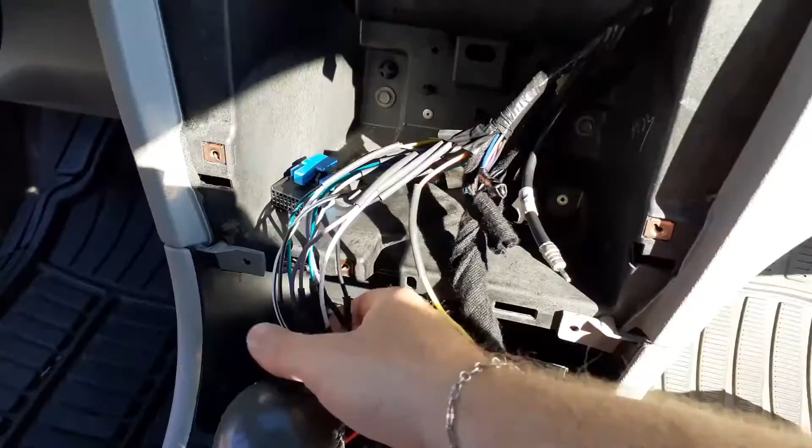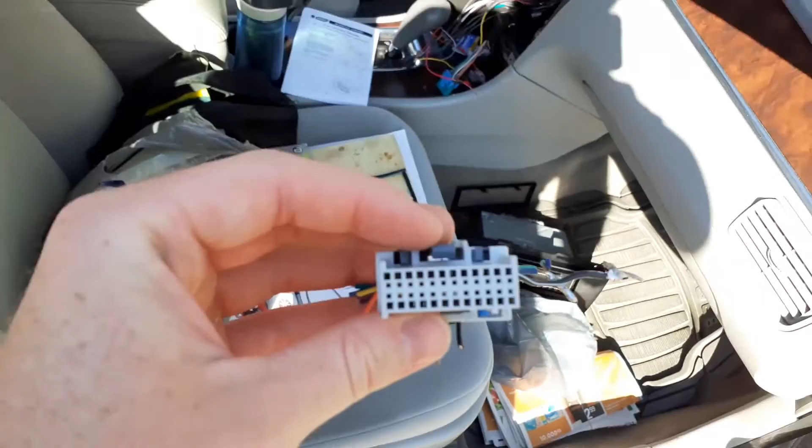So that's what the wiring looks like right now. I cut off the factory radio harness, just completely cut it off.

Here is the old radio that was in there. There's no aux or Bluetooth or anything, so there's no way in hell I'm gonna drive without that. So I'm putting in a new one.

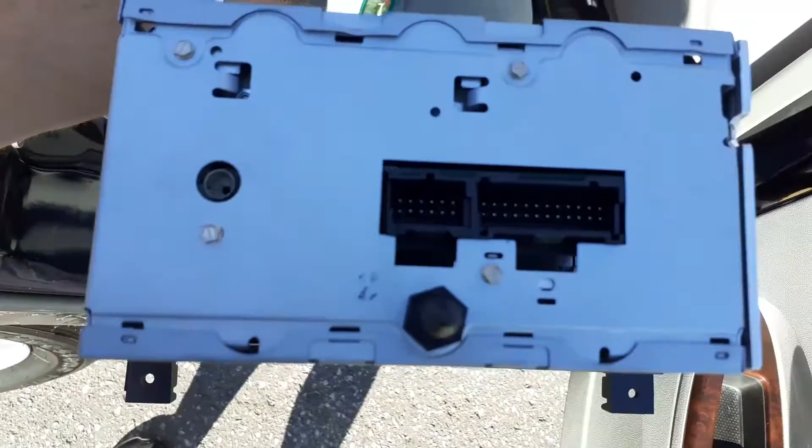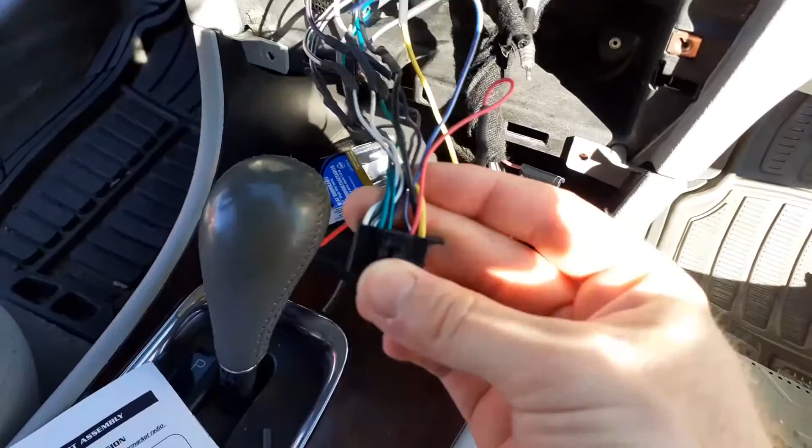As you can see in the back, it's kind of hard to see, but there's two wire harnesses going into it, and then one port here for the antenna. A lot of GM vehicles, it's going to be pretty much the same. This is the harness going into the Pioneer here. I haven't soldered them yet, but I've sort of pre-made the connections here.

It was a bit more complicated than I thought it was going to be, because there's OnStar, and there was a bunch of wires that basically you're not going to be able to use with an aftermarket stereo.

As you can see, there's a bunch of buttons on the steering wheel here that normally would control the stereo, but with the aftermarket it doesn't really give you the option.

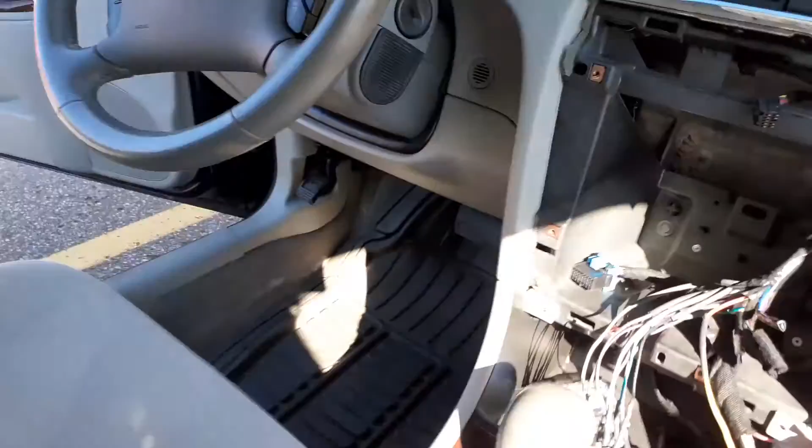But there is an adapter or something you could buy, but it's like 120 bucks, and I just didn't feel like spending all that money. I never really used the steering wheel controls, and all these wires here were originally plugged in.

So as you can see, I basically have no use for these guys anymore. I'm assuming these wires were to control the steering wheel controls, like volume, next, switching channels and all that. So that I won't be needing.

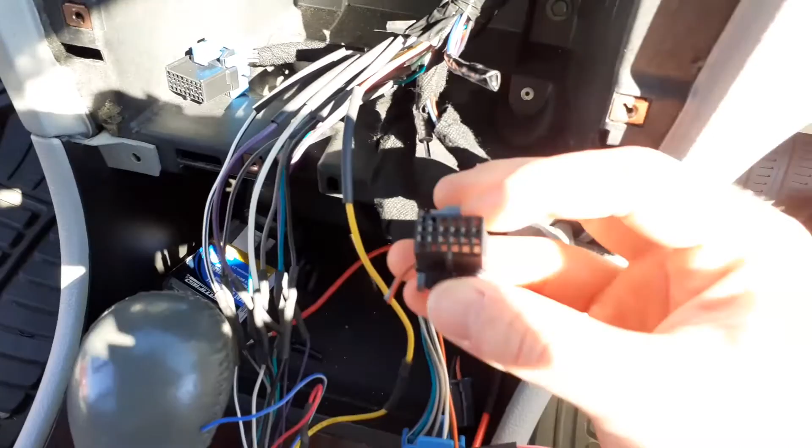And these here, I'm not really sure. This is the second harness, right here, the other harness that was plugged into the stereo. But there's only two wires, and honestly I don't really have much idea as to what they're for.

But I already tested all this. I haven't soldered it yet, but it's good to just tie them together, and I plugged in the stereo and everything works fine. So yeah, and I googled the wiring.

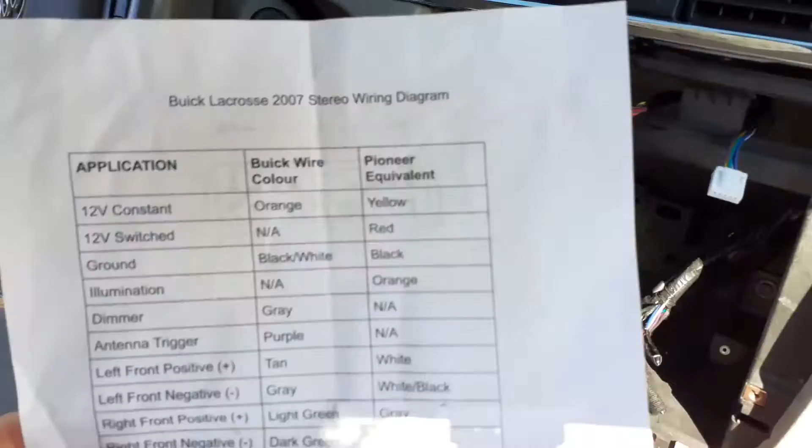Actually, you know what, I'll just show you guys, and then you can pause the video. This is for a 2007 Buick Allure stereo wiring diagram. So this is the Pioneer colors.

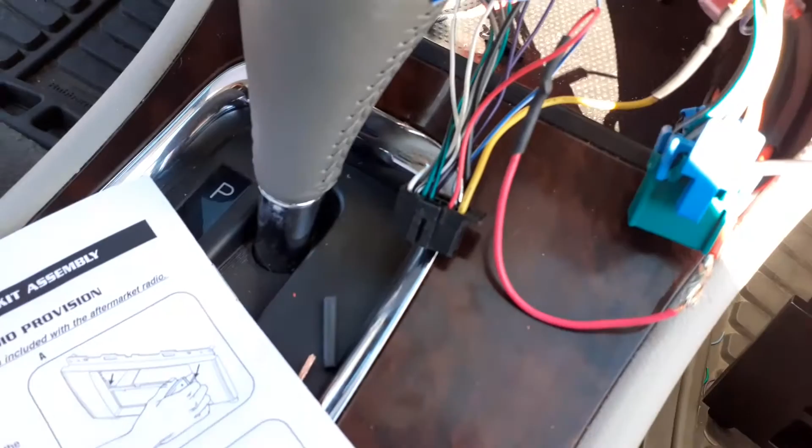So those ones there coming out of the black harness. And then, as you can see further up, it's kind of hard to tell, but this part here is coming out of the car. And then I'll just show you here, see I twisted them together, so I could test it before soldering.

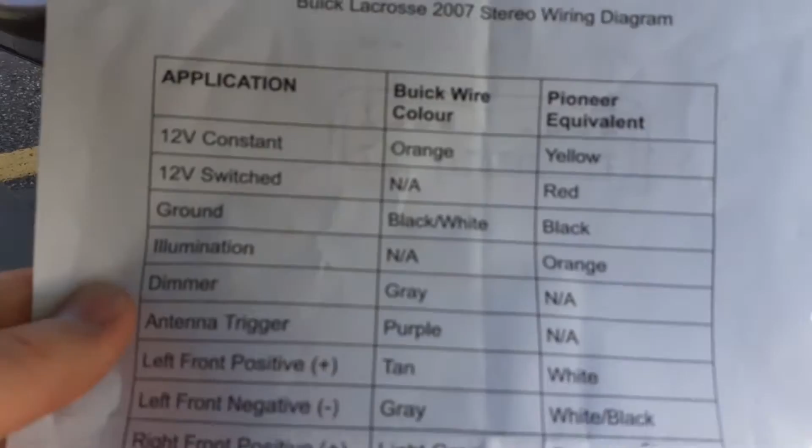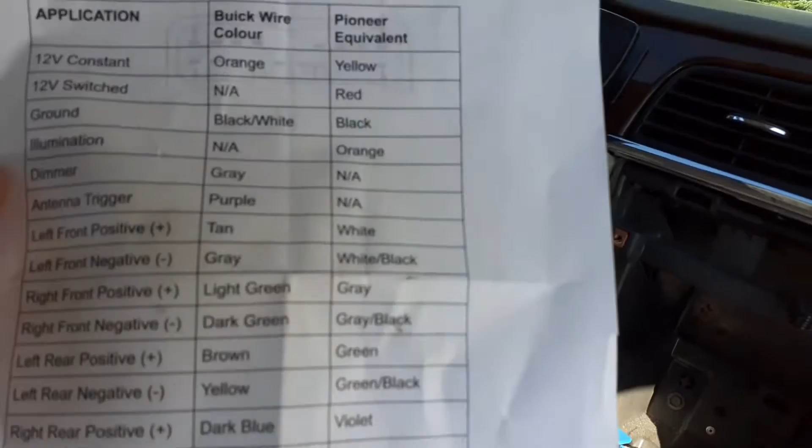Okay, so I just googled Buick Lacrosse stereo wiring diagram, and basically got this whole row here, the Buick wire colors, and then the Pioneer equivalent. This is the universal aftermarket colors here, like EIA or whatever, I forget the name, but they're all universal.

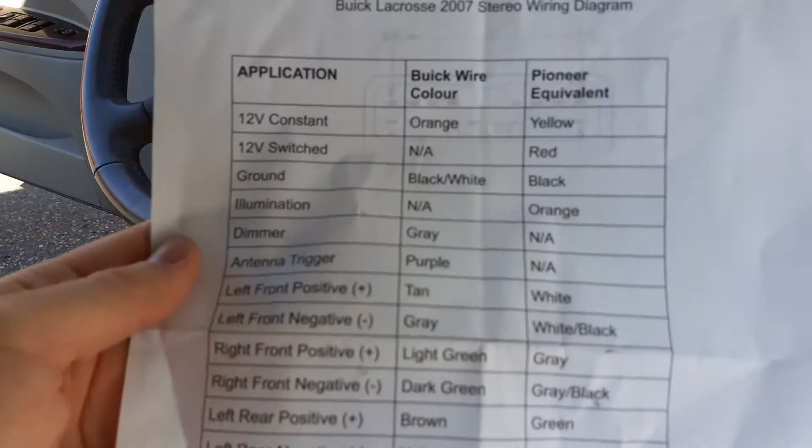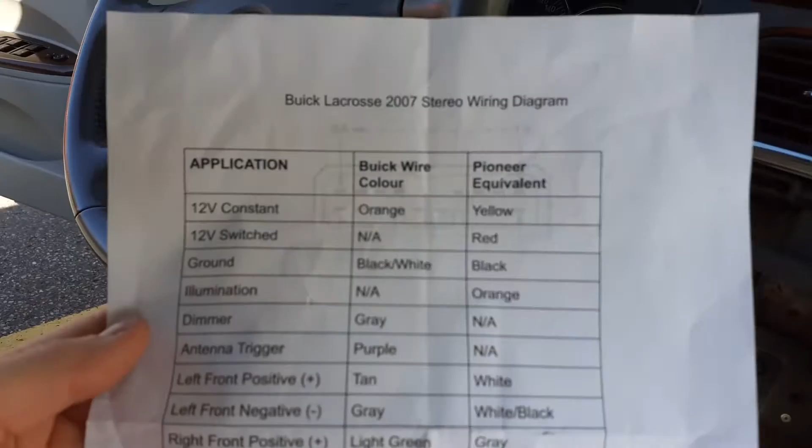So yeah, if you've got a Buick Allure or possibly a similar GM vehicle or another Buick, it very well might be the same exact colors for your car as well. So yeah, pretty straightforward.

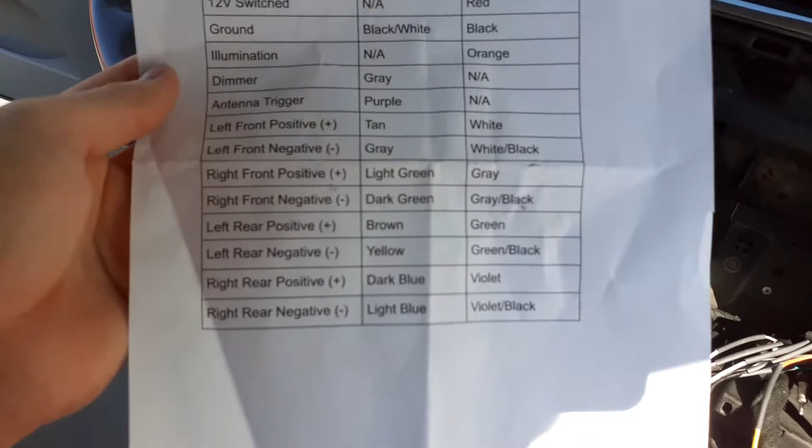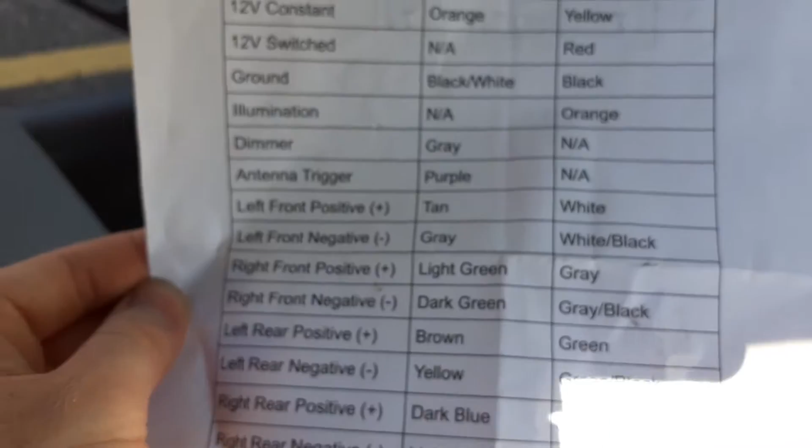There we go. Yeah, so if you want to pause it, some of the wires are going to be slightly similar, like there's 2 gray wires coming out, so it's a bit confusing.

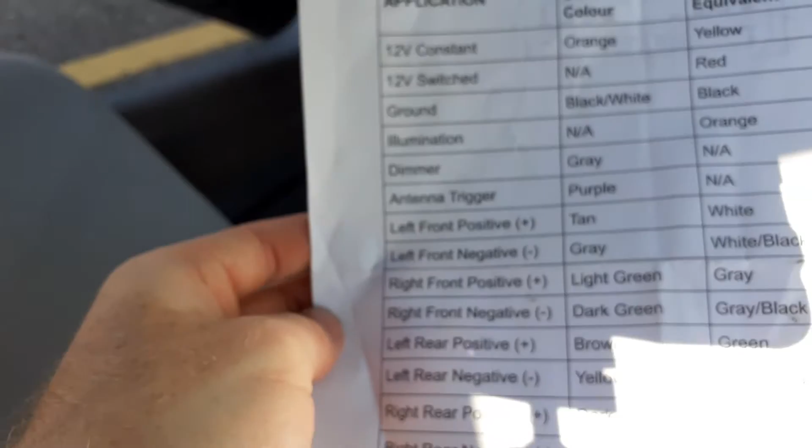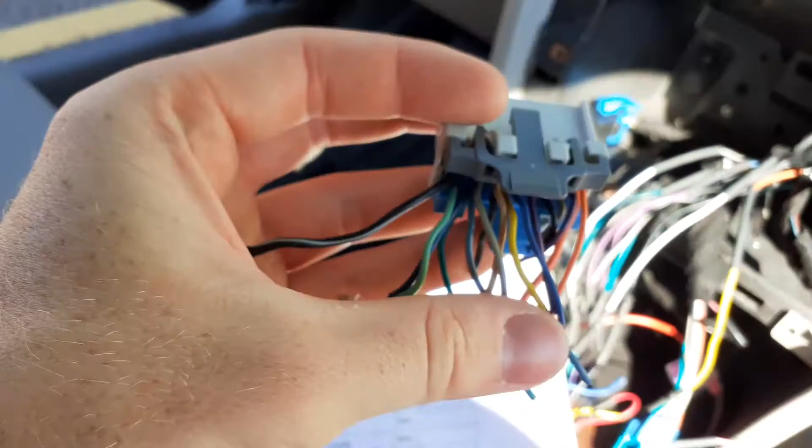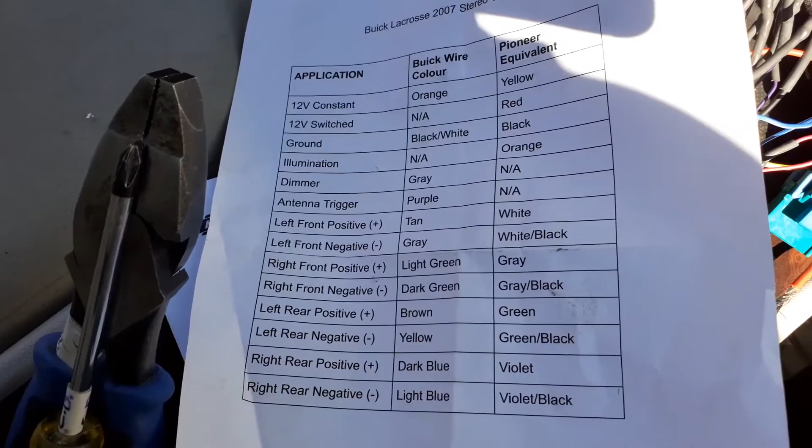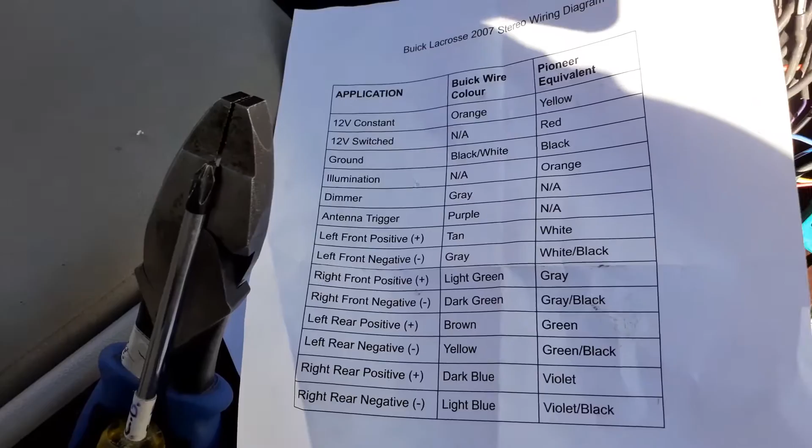But the way I did it is, when you take the factory harness and look at the wires coming out, you can distinguish which one is which, because for example left front positive and left front negative will be adjacent to each other in the harness. So let's say left front positive is tan, and left front negative is gray.

So you can see there's a tan wire and the gray wire there that I pulled up. But what confused me at first was that there's also another gray wire. I'll pull these out of the way, there's another gray wire here. As you can see, I'll point to it right here, this guy is also gray.

But the way you can tell is that these are adjacent to each other, so these are going to be both the front, left front speaker wires. The gray being negative and tan being positive.

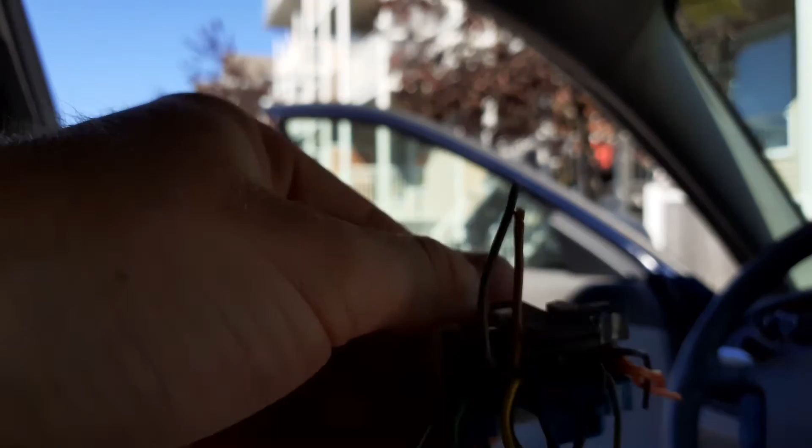Okay, so now that we got all that covered, this isn't as straightforward as you might think. Even if you did have a wire harness, it's a bit confusing, because the problem with this car is that there's no switch wire.

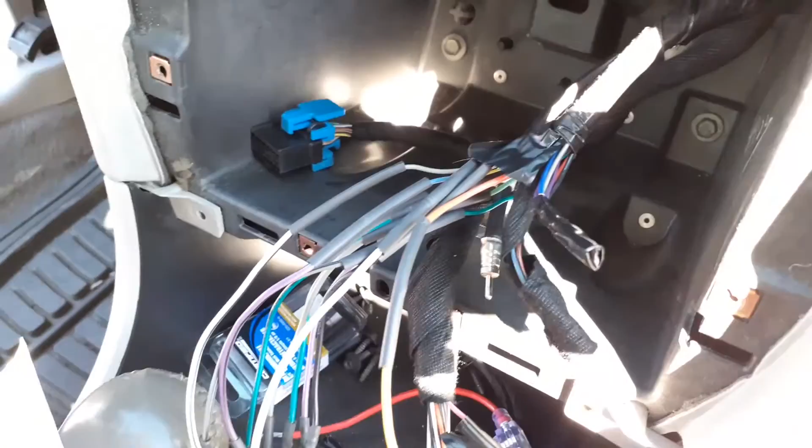So there's 2 power wires going to the stereo. Here, I'll show you. There's the yellow wire here - this is the constant power, the 12-volt constant power, connected to the orange. The way I found that out was I took a multimeter and probed every wire to see which one had 12 volts. It was around 12.2 volts.

And then, so that was this wire. But I also checked - even with the key turned, you should have another wire showing 12 volts, the switched one that comes on with the ignition. As I was turning the key, there was no other wire that came on. But you need that for the stereo in order to turn it on and off, because this constant wire is really just to serve the memory in the stereo, to keep your presets and basic settings so it doesn't reset every time you turn the car on.

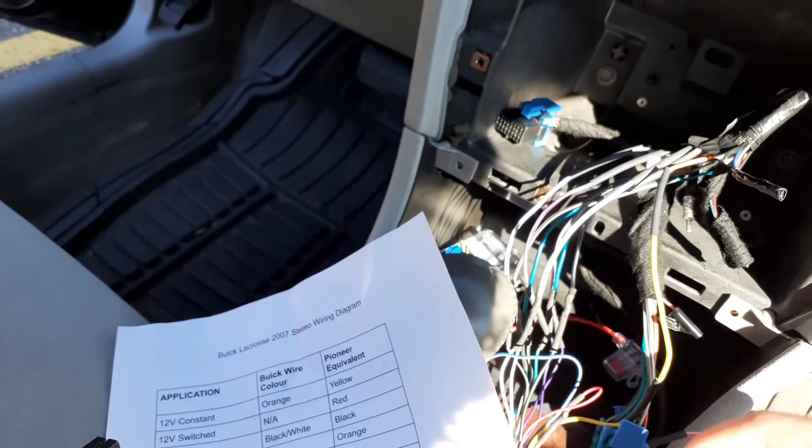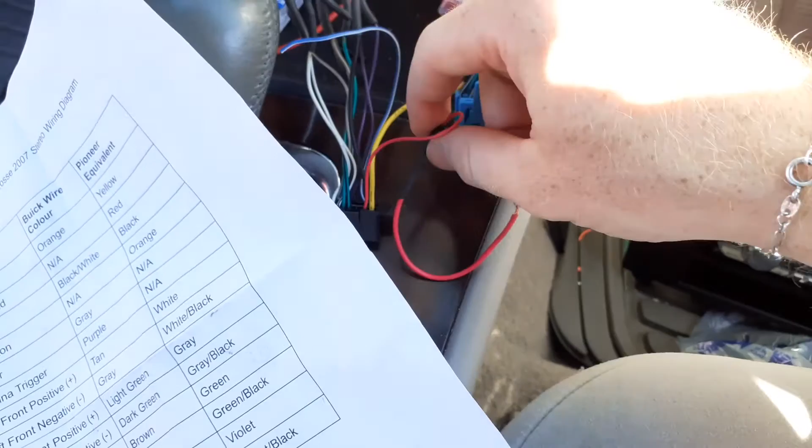So that's what that's for. And then the switched wire is - where is it? Oh yes, so this is the switch wire here, this red wire. Normally the switch wire is red, and the constant power is yellow.

Hey guys, I forgot, so I kind of ran into an issue. I had it hooked up to the AC, or the temperature control unit, and the issue was that it only came on when the key was on the setting right before.

Fuck, my cat's just got her dirty paws all over my car seat. Anyway, but...

So I don't know, it was kind of annoying because what happened when you turned the ignition or the engine off, the radio would come off as well, because when you turn it off, it skips one of the key positions. So it was just annoying because every time I turned off the car and I still wanted to listen to radio, it would just turn off as well, and then you'd have to turn it one more click.

I forget the name of the key position right before the... Hey, get up. Freaking cars - or my cat was just scratching at my seats.

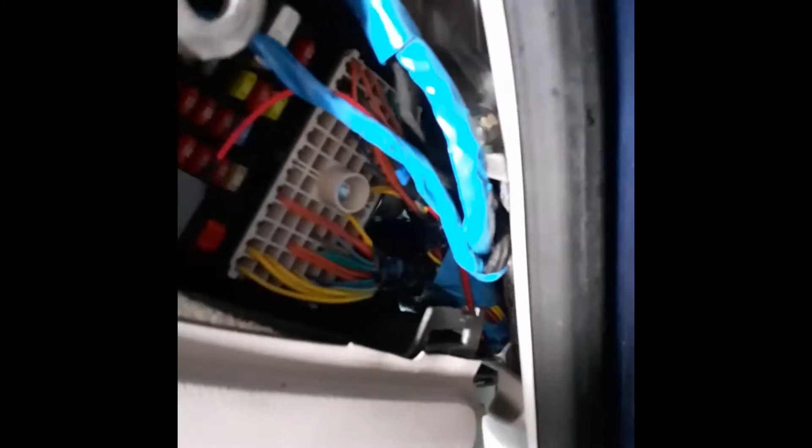Okay, so this is the fuse box on the passenger side here. There's a lot of accessories and stuff. Through process of elimination, I basically tested all the fuses, and the sunroof fuse ended up being right below this gray box here.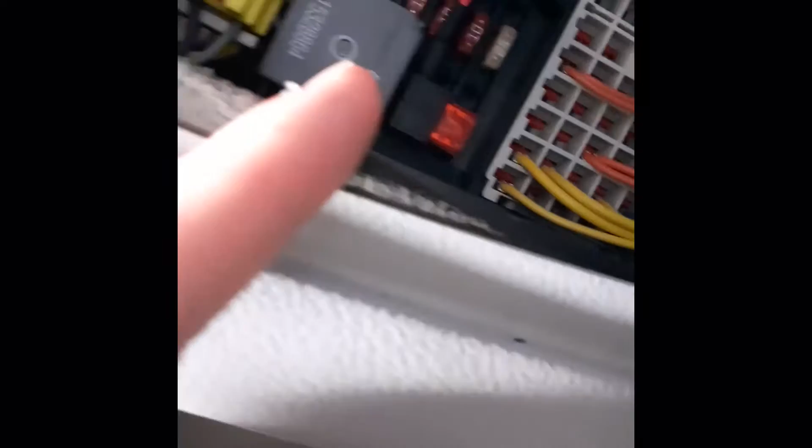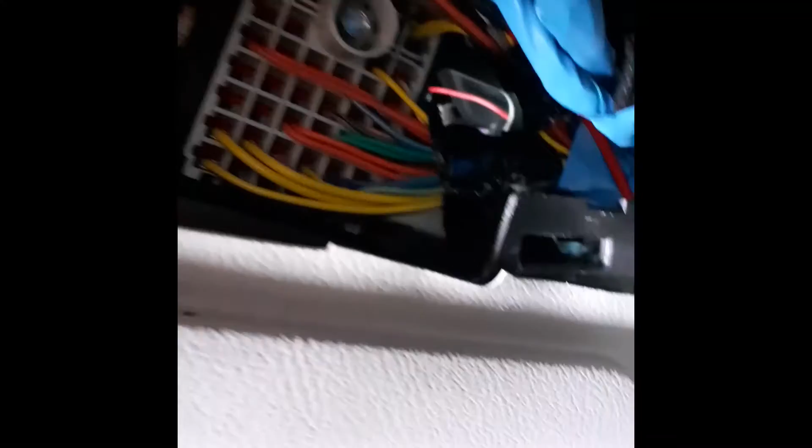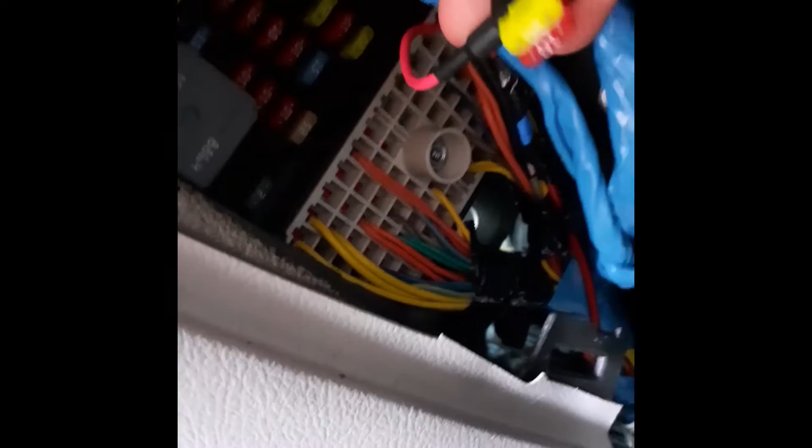So here, I'll show you what it looks like. The sunroof fuse is a 20 amp, and this is the fuse that connects into the switched power line going to the stereo. You can see it's being run behind the glove box, and then into the dash right here and out through there.

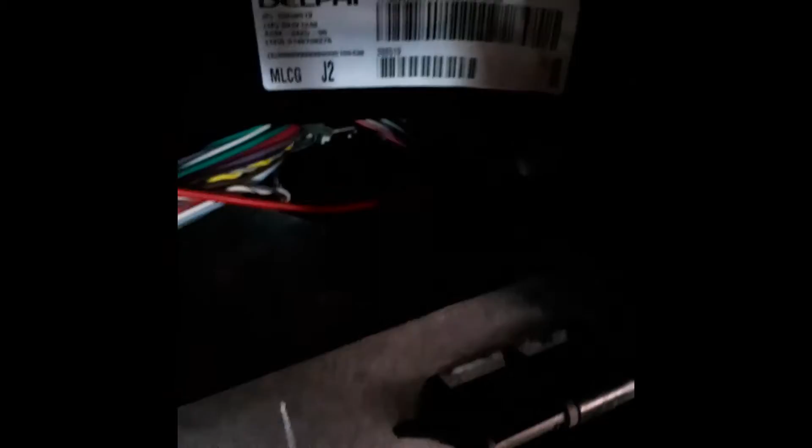I don't know if you can see the zip tie, but I'm just routing right now. You can see one zip tie there, I've got one more down there, just making it clean.

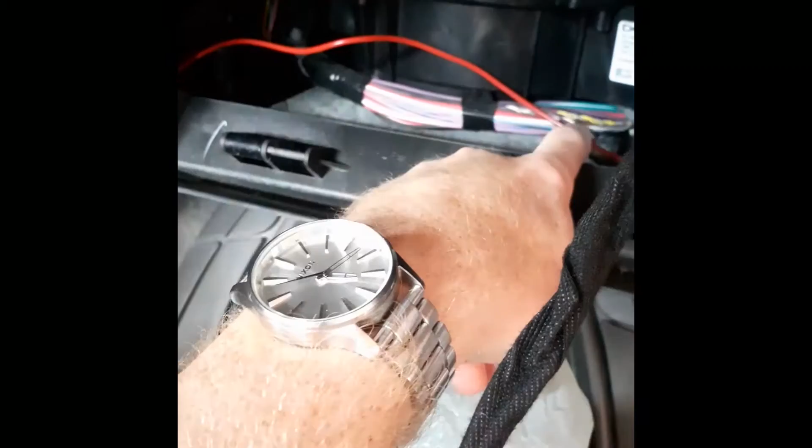You want to make sure not to run it in front of here, which is the airbag, where the airbag comes out, so just steer clear. Just a little advice: try to run whatever cables you're adding, like a sub or whatever, along the same line they took in the factory where all the other wires are. It's easy and safe to just follow that line, so you know you're not in the way of anything.

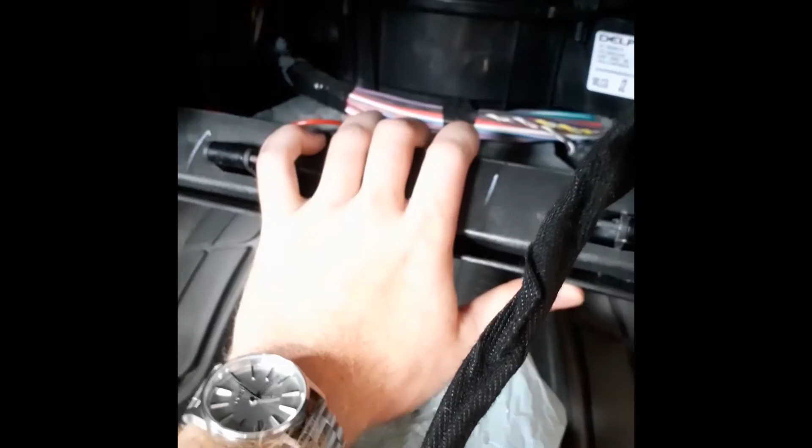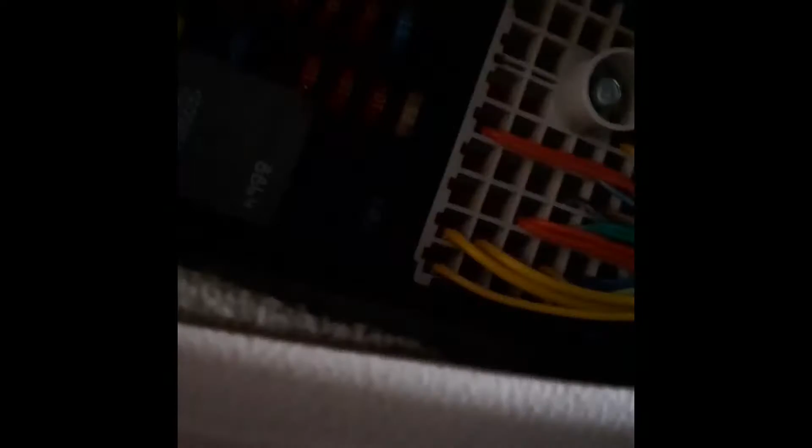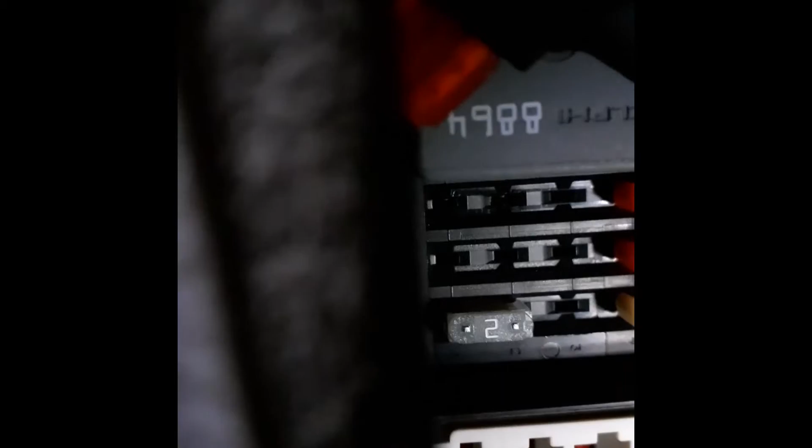So this is what it looks like. There's two prongs - this is where these go into the original slot, two up from the 2 amp, right below this gray box. That's where the 20 amp sunroof fuse used to sit, and that's exactly where you're gonna put the fuse tapper add-a-circuit device that you see right there.

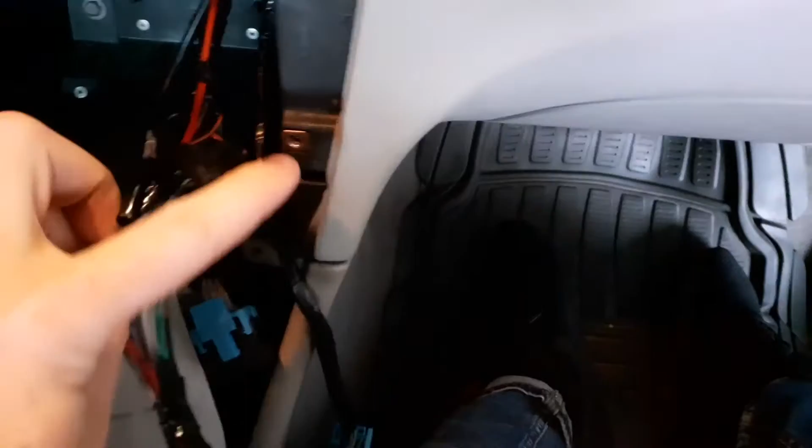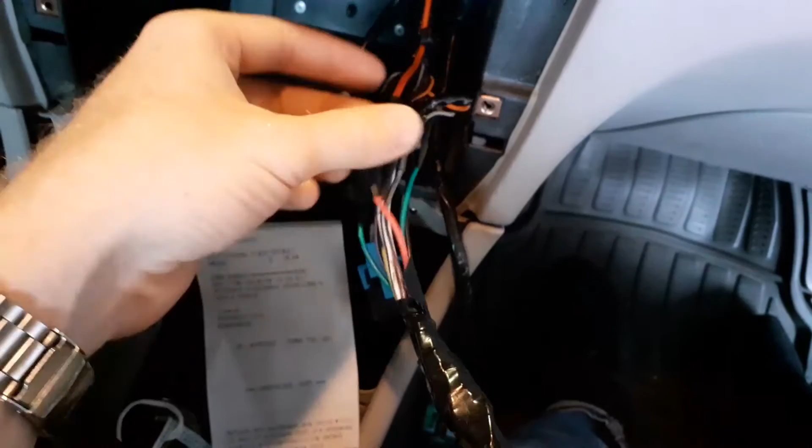So this was the inline fuse tapper thing that I set up for the sunroof fuse. This is the switched wire here, the red wire there. I soldered it on, and that's what it looks like. It just keeps going out through there, underneath the glove box, and into the fuse box right there.

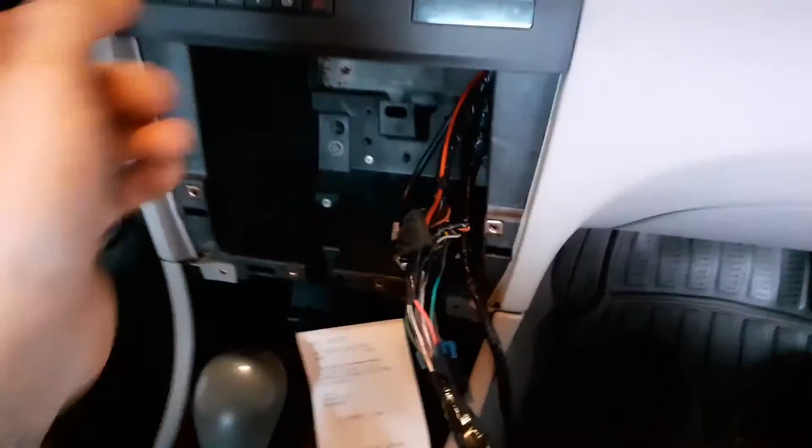So now I'll be putting this all back together. I'm gonna tape this up a bit, tape these loose wires up, make it nice and clean. I guess I could just film myself doing it.

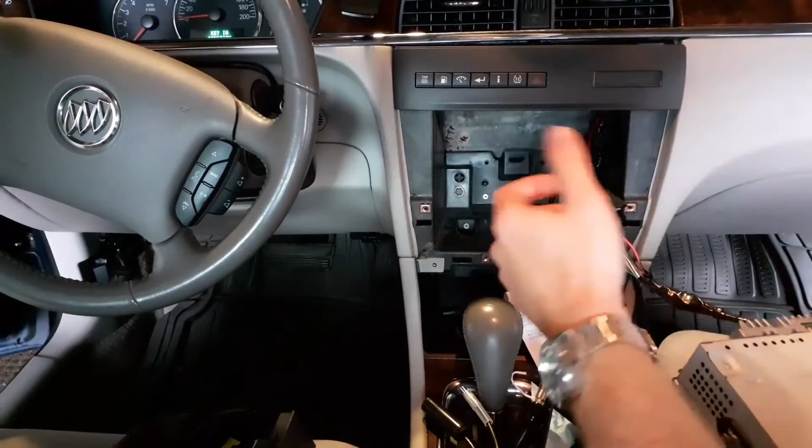Oh shit, I need some... yeah, I guess I can just close the ignition off. I don't need that one. And I can, just to make my life easier, I'll unclip the radio. Don't need that right now. And there we go. Put this on the ground for now. Whoops.

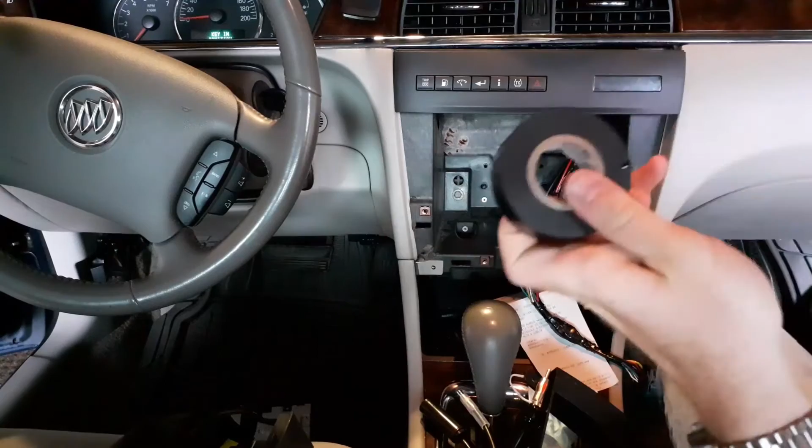Alright, I'm just gonna go grab some electrical tape. I'll be back. Okay, I'm back, got my handy dandy electrical tape, and I'm just gonna clean that up a bit.

So we don't have wires as exposed, and less chance of someone getting tangled and possibly ripped. So just gonna tape around this whole thing here, pretty much.

Probably won't ever be taking this apart again, except maybe if I were to salvage the radio once this car dies. Which is kind of sad to think about, but happens eventually to every car. But for the time being, you want to make sure everything's as clean and secure as possible.

So there's some different length wires, so that's why they're kind of bulging like that. But that's fine, especially with this electrical tape that I'm putting over - it'll do a good job of protecting this. Never have too much electrical tape. And voila.

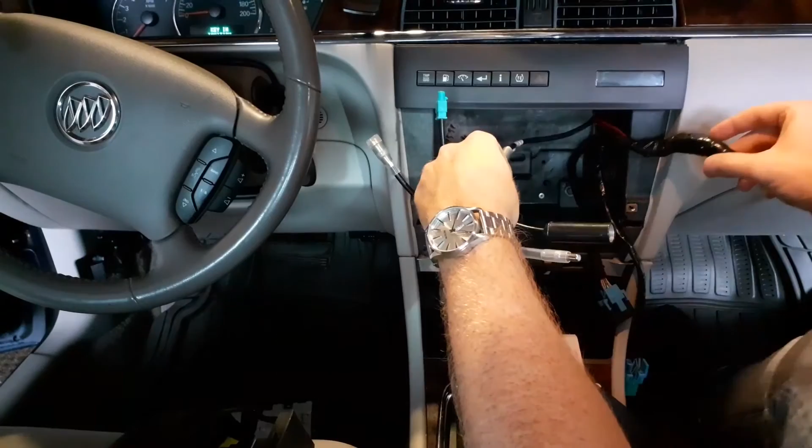I'm pretty much set to start plugging stuff in. Okay, so, and voila, it's all good to go. Final product looks pretty good, really happy with it. And this time the radio comes on with the accessory mode, so freaking mint, bud.